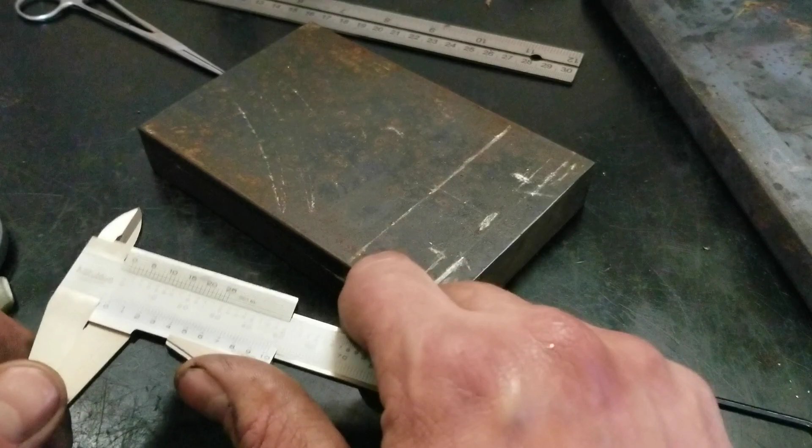So even amongst the toilet paper shortage, I happen to be short on end mill holders now too. I got some material in, and I've been kind of drawing it out. And yeah, sorry guys, I'm kind of hell bent on cutting the freaking dovetail because I haven't cut one yet. So that's kind of what my plan is for the future.

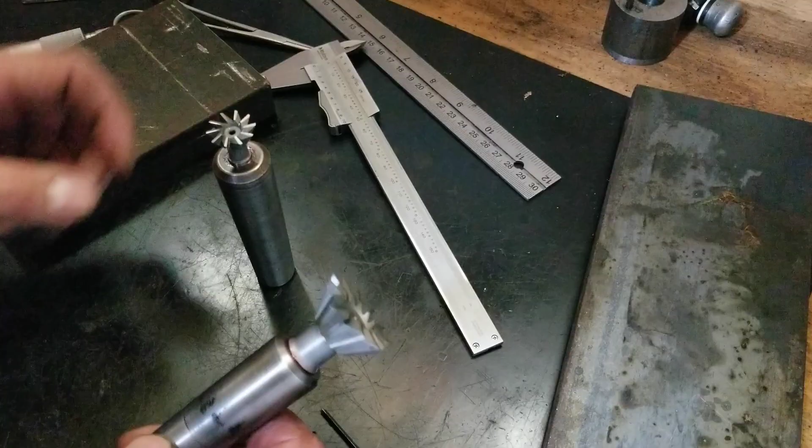So I've gone ahead and turned my only two good end mill holders into dovetail cutter holders. I stuck them on the lathe and I made sure that they were all just really perfect. I got them within maybe half a thou, probably less, of runout. So they should be pretty good. And yeah, I just Loctited them in there because, I don't know, it seems to work really good.

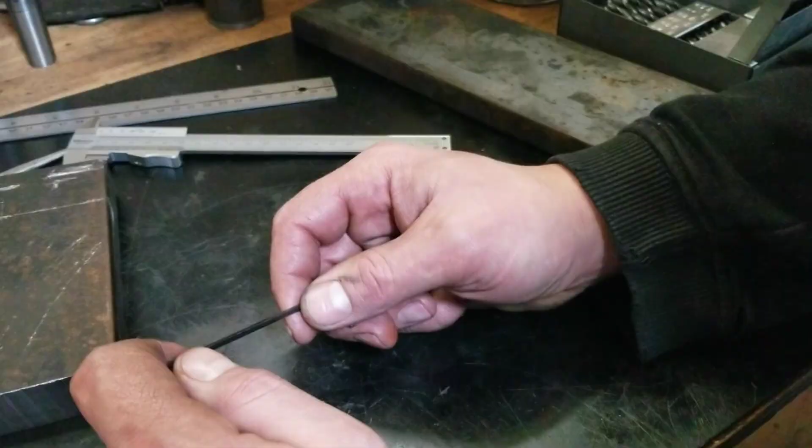So I know I've made end mill holders before, but I'm going to go about it a little bit differently this time. Incidentally, I've found a really good use for my steady rest finally. So let's head over to the lathe.

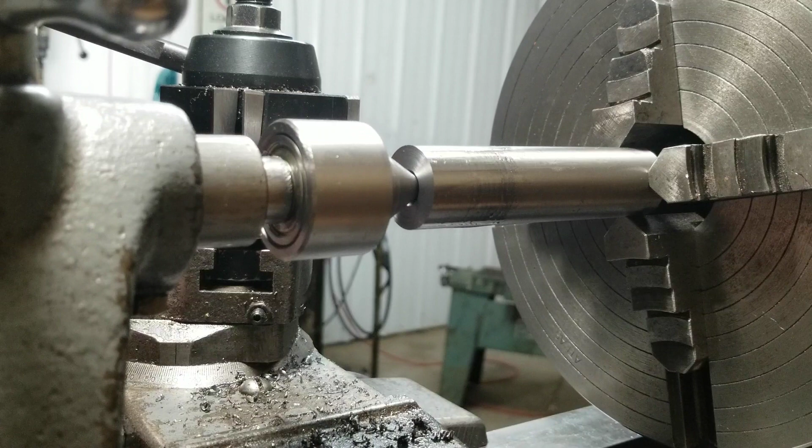All right, hopefully this angle's good. Let's see how good this fits up in here now. And that is, oh yeah, that's a really nice fit in there. You guys see that? Oh yeah, perfect. The reason I wanted to do the steady rest is so I didn't have to take this out again.

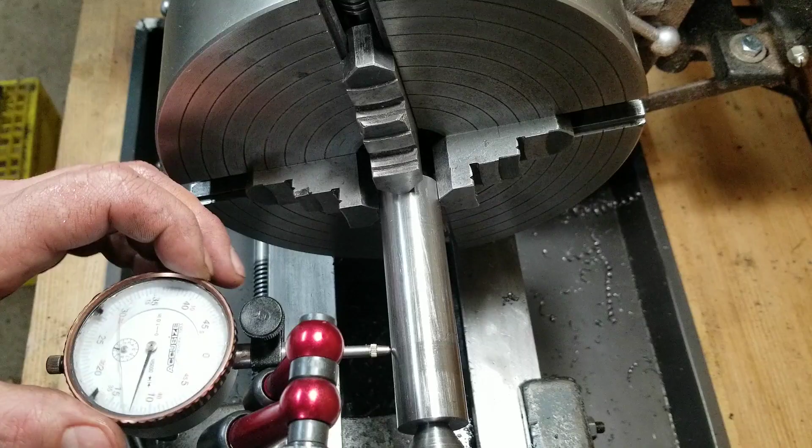So now I can cut that whole taper in there, essentially, without ever having to pull it out of the chuck. Dress up the end and cut the taper, and then it's done. The only part is I'll have to take it out to put it in the spindle. But the hardest part here is... that's amazing. I didn't think I'd get that on the first try. Sweet. All right, nothing doing but to get to it, I guess.

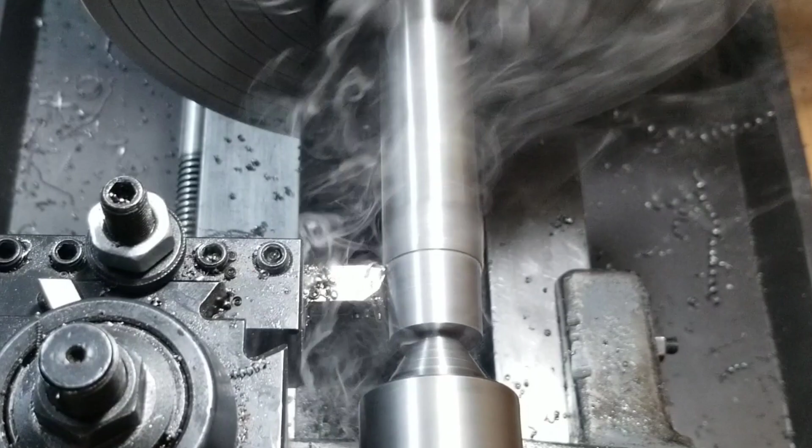All right, well, we're getting pretty close to the nitty gritty here. Looking for 778 thou on the end here, and then we're gonna have to switch it up and move to the other side of the taper. So far, everything's going pretty good. So we're 815, 835 thou roughly. It is kind of important to get it at least close, otherwise it'll be sucked all the way into the spindle, which is not good.

So we'll bring it in, we'll take another 30 off, and then we'll do a finish pass. That's 30 off the OD.

Yeah, I've had to stop every now and then because I've bought this real cutting fluid, I guess. And man, it smokes like crazy. Holy cow. So I've had to open the doors up every now and then.

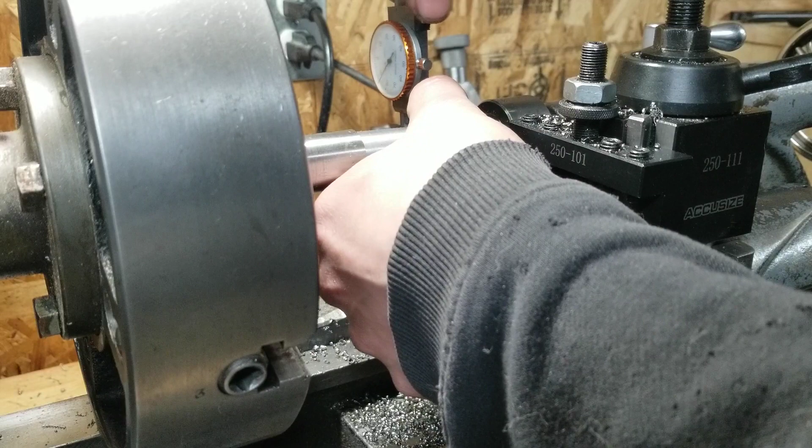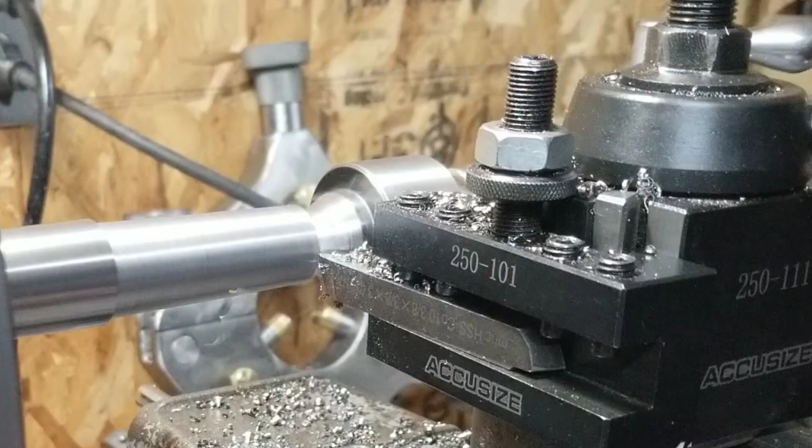Chips are breaking off really good though. Even for the high-speed steel, I got a pretty nice rake on there. That's a pretty decent looking finish on there. Okay, let's see where we're at here. Try to get as close to the end as possible. Yeah, we're 780 something here, so that's probably close enough. Well, maybe we'll just cut a quick little relief in there. That's about it.

Alright, now if I recall what I did last time, just to make sure that I didn't go too far, I wound this up all the way. The whole length is supposed to be 3.18 inches or something. So we should have plenty of room here. This is a good way to find your stop.

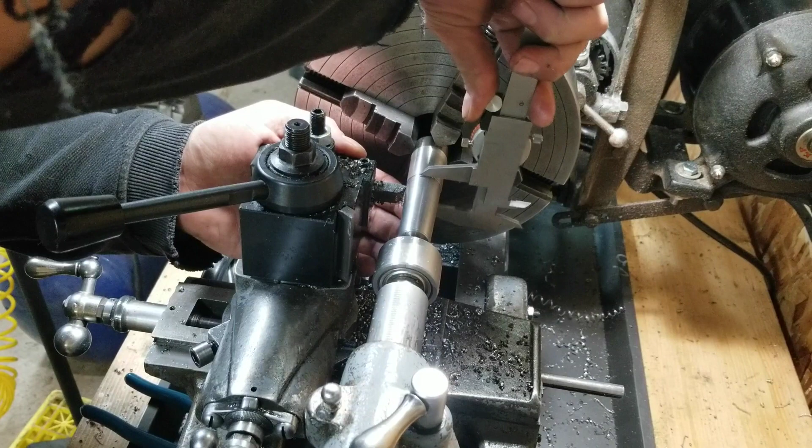Just want to see the difference here so I don't end up going too deep, because when I blend that in there, I'm going to mark it up a little bit. And 900 almost exactly. And 925. Alright, so yeah, it should be good right there.

Alright, I had to pause there and talk to the neighbor.

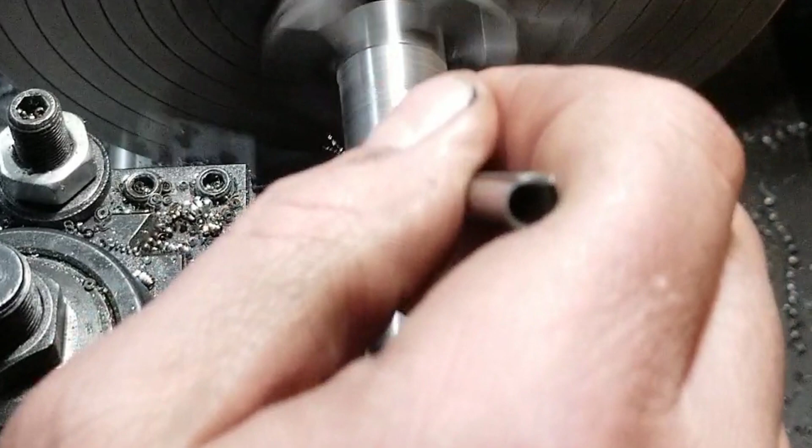So yeah, I'm gonna just barely nick that marker and then finish the rest of this taper off. That's the plan anyway. It might even be too much. About there. I think that should be pretty damn close. I didn't go far enough back here. That kind of sucked. I think that's what I did. There we go.

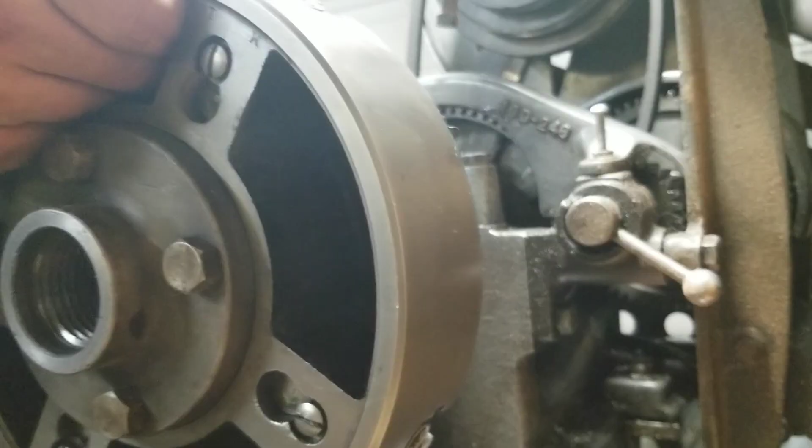And that, in theory, should be a Morse 3 taper. It sure feels good. We've got contact there, here. Looks like we got some right in the middle there. Well, it's really difficult to see. We got some right there. So yeah, we got several points of contact, the majority of the way down. Yeah, I think we'll be okay. All right.

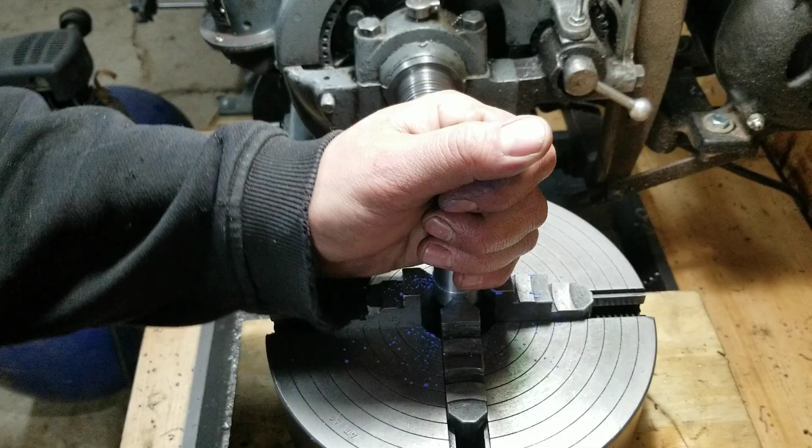So I actually have one more of these to make, and then one more taper, plus it's gonna have a big end on it for something.

So what you see me doing here is, well, I'm gonna make a fly cutter, I guess. Just a little guy, because obviously this thing can't handle too much more than that. I'm taking out 25 thou increments. Unfortunately, my Monarch is in the shop, so no 250 thou cuts this time.

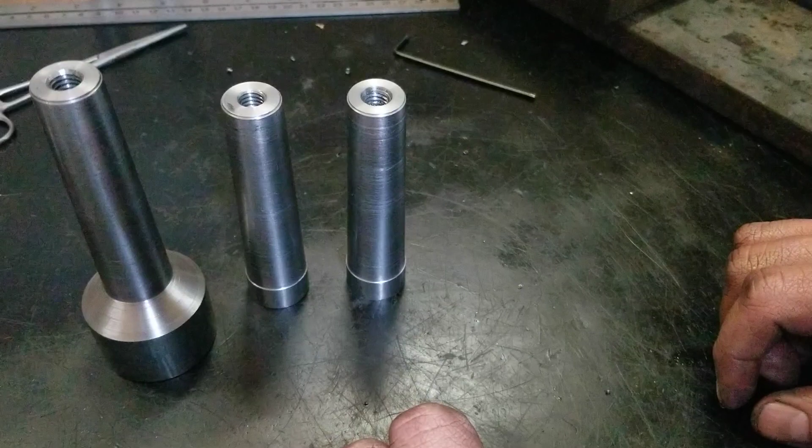Alright, well that's a start anyway. So that's going to be the fly cutter at some point. I'll turn that down and then I don't know what kind of angle. Some kind of arbitrary angle.

So these two are pretty basic. I actually think I have video on that already. So we're probably just going to skip those. That's just more of the same. But I have not made a fly cutter yet. So I'm going to stick this in the lathe. We'll turn off the outside and face it up and get doing some milling.

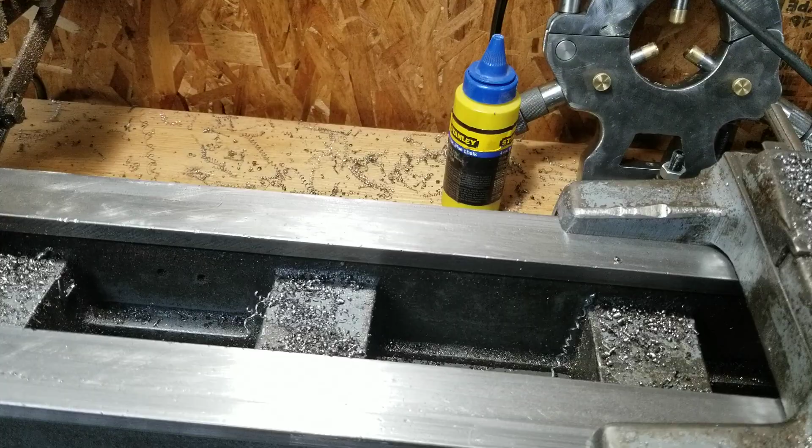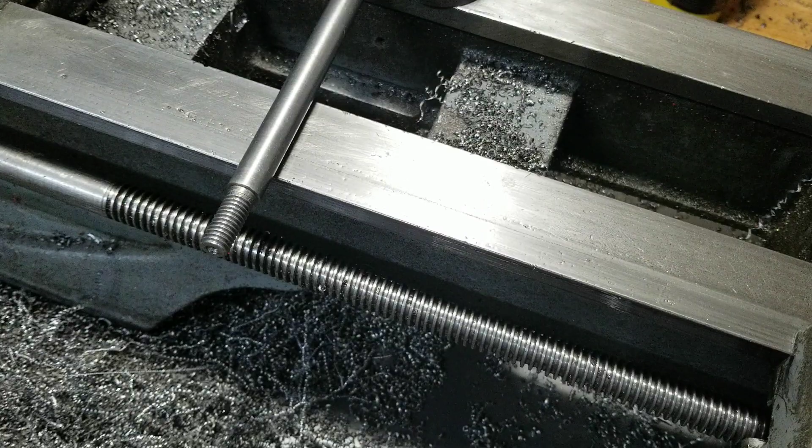All right, well, I generated a pretty good pile of chips. I think it's probably a good idea to clean some of that up. That's actually only about half of them. There's the other half.

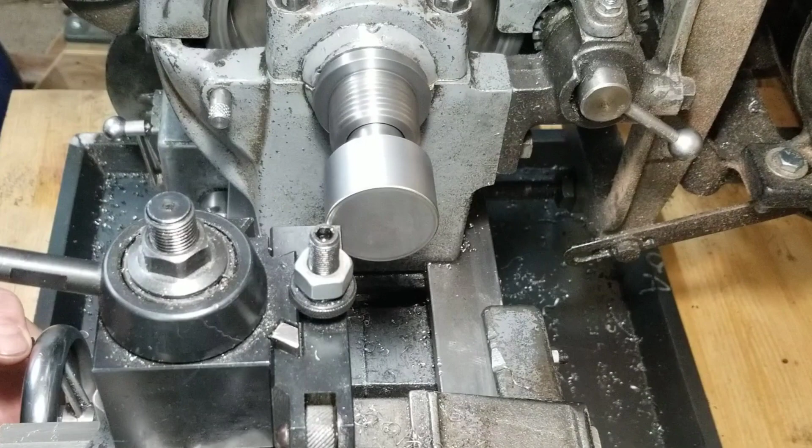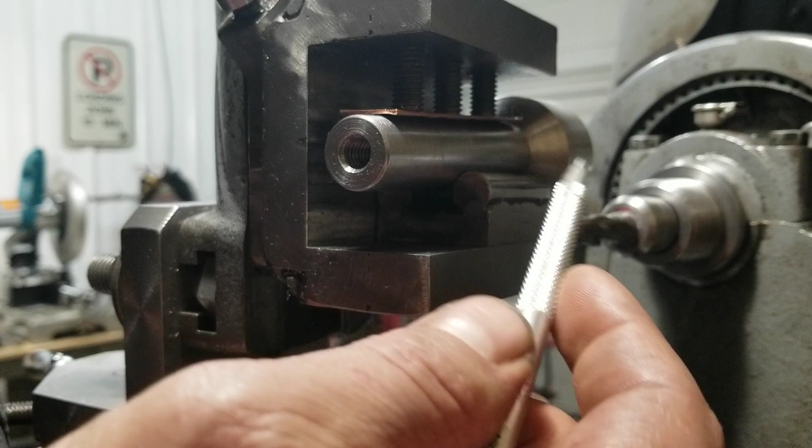Alright guys, this is our milling setup here. See if I can't get in the back to show you what's up. So I got it in the makeshift V-block sort of deal, and I clamped it in there, got some copper, and I realized the angles on here or whatever is there, but I squared it up to the ways plus stuck an indicator on it, and it's within about a thou. So it should be good there.

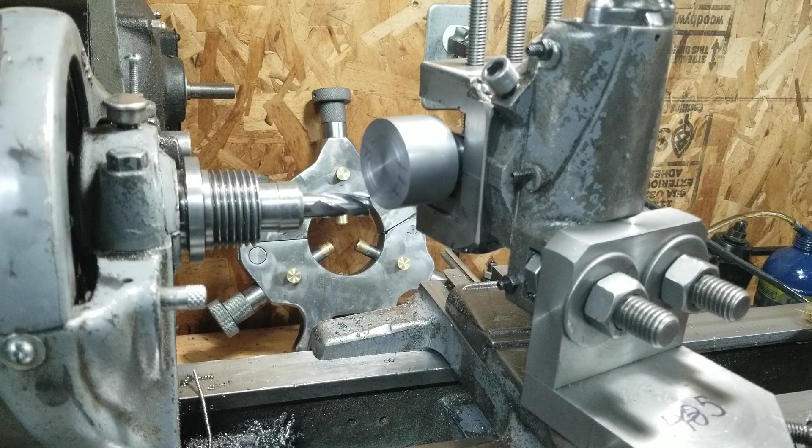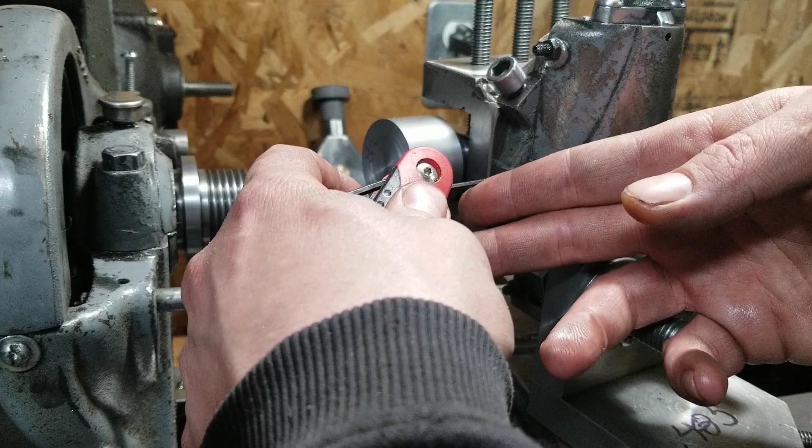Miraculously, we got just enough clearance on the top and bottom for this end mill. Ooh. Okay. Oh, this clumsy thing. Oh wow, this is actually going a lot better than I thought. That's a big cut. I think we're probably 200 thou in depth there.

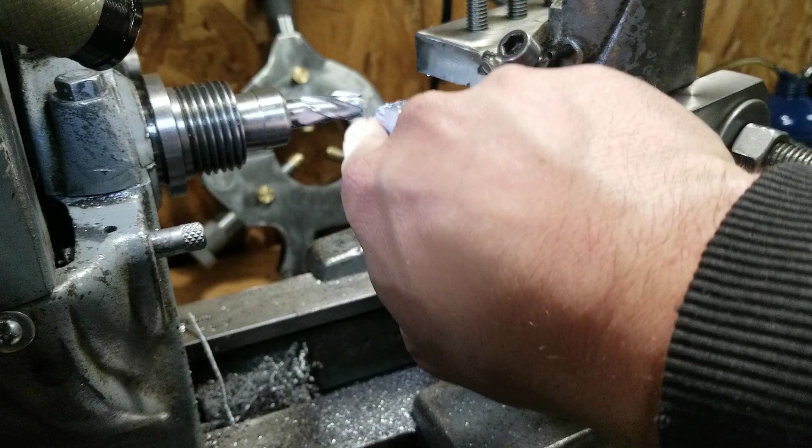Well, I gotta say, I am really happy with how that milled out. That's pretty good. It's the nicest end mill holder I got so far. Yeah, that is not bad. It's a pretty deep cut too. Well, deeper than I was planning, but that's actually good, I think. So yeah, I'm gonna finish milling this out, and I'll get back to you. Well, I guess I'm going with a 15-degree angle. See you in a bit.

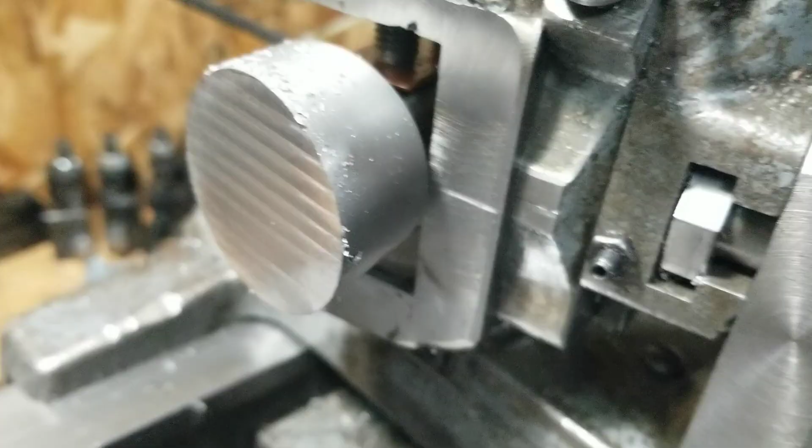All right, let's take a look at this beauty. Yeah, for a milling attachment, it did okay. I was doing pretty sizable cuts too. So now we're gonna have to take a more sizable chunk out of there yet, out of the top here, and mill another slot down here for the tool.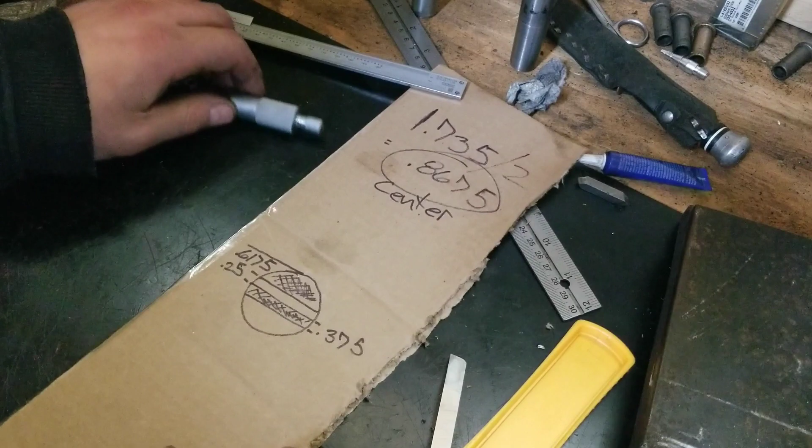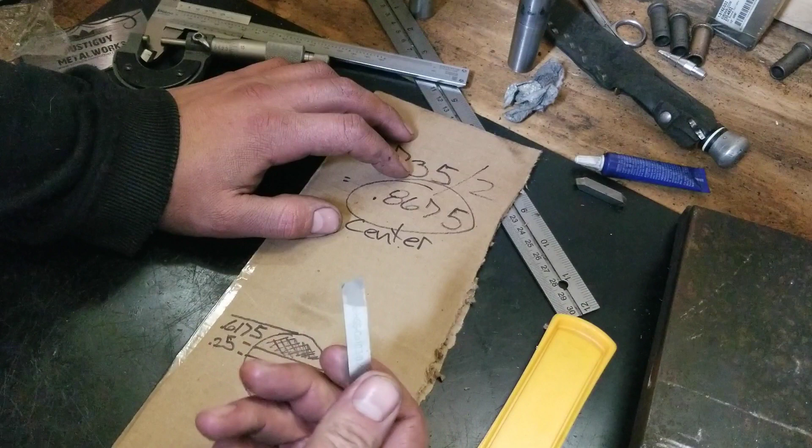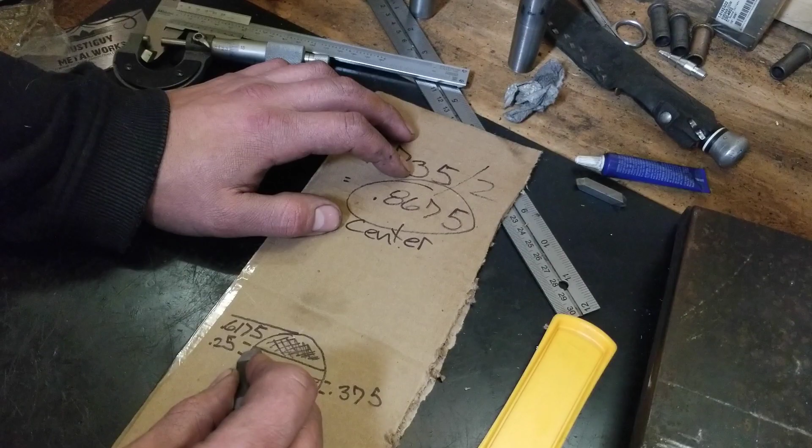All right, so here's my plan of attack. I got it drawn out here. This is where it's sitting at the moment, looking at the face, right in the lathe, mill, whatever you want to call it. So I plan on using 3/8 tooling. I checked it out, it's actually 2 thou under, so I'm just going to go straight up 375 on that for 3/8. I'll leave a 1/4 inch there for the set screws, and then this is all going to get milled off to the same depth. So this will be 375 square in there. But to do this part, you're gonna have to wait till that 1/4 inch end mill or reamer gets in.

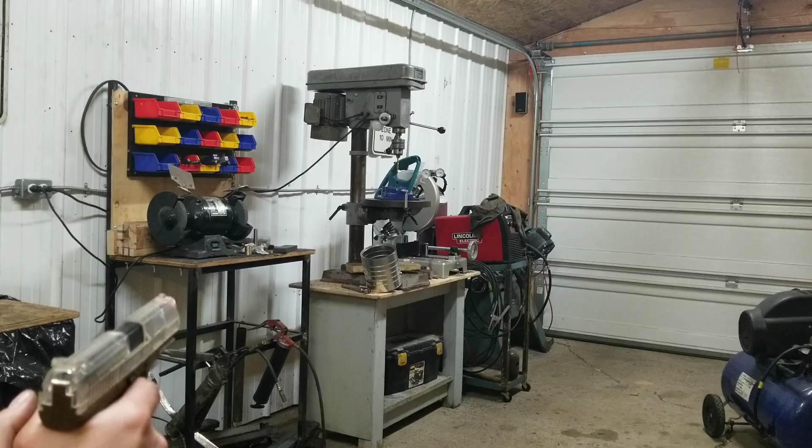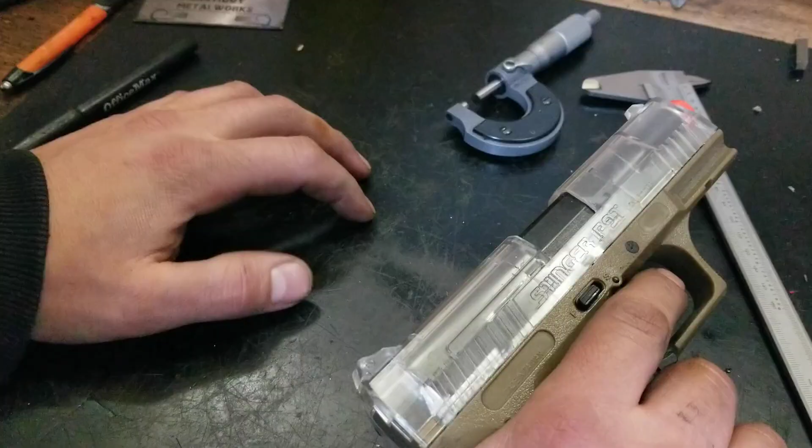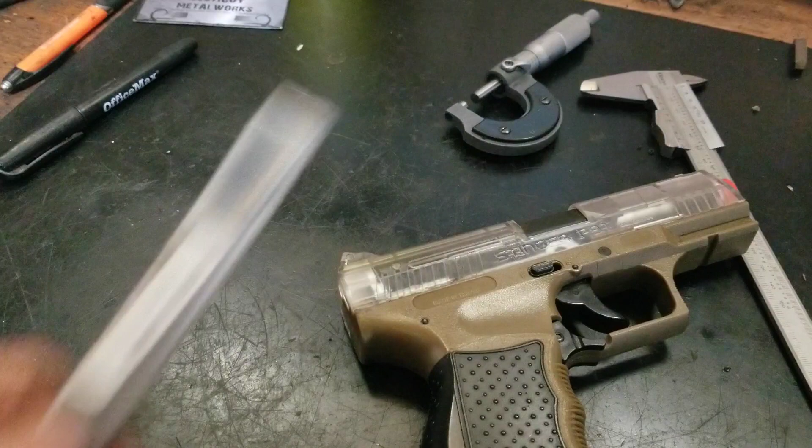Oh! Package for you, sir. Right, thank you very much. Finally.

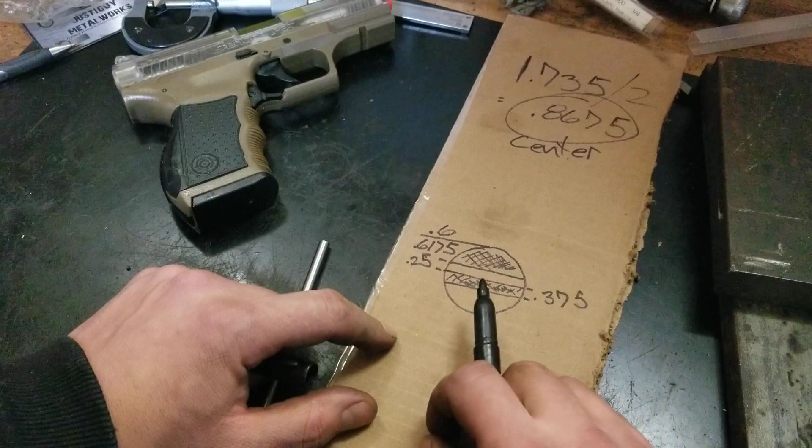Alright, so we got our tool to make this tool. So these numbers here, I've already got it dialed into where I'm going to start. This number here is 6175, that's an arbitrary number. That's just the maths. It doesn't mean that we have to take that much. It's always best to simplify this stuff. If you want to do it to the nearest thousandths, honestly, you just do this. It's not a big deal. Or 615 or whatever, something simple. It's a lot easier to wrap your brain around it and get it done.

All right, so I got her all set up here and dialed into where I'm going to start. On the y-axis, we got 150 thousandths. The z-axis, we got 125. And then we're just going to use the x for the travel. Got everything locked in already. She's pretty much ready to go, about 800 RPM, give or take.

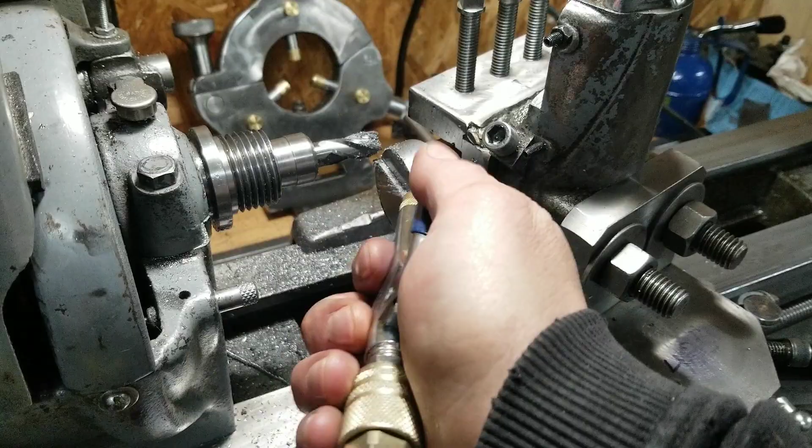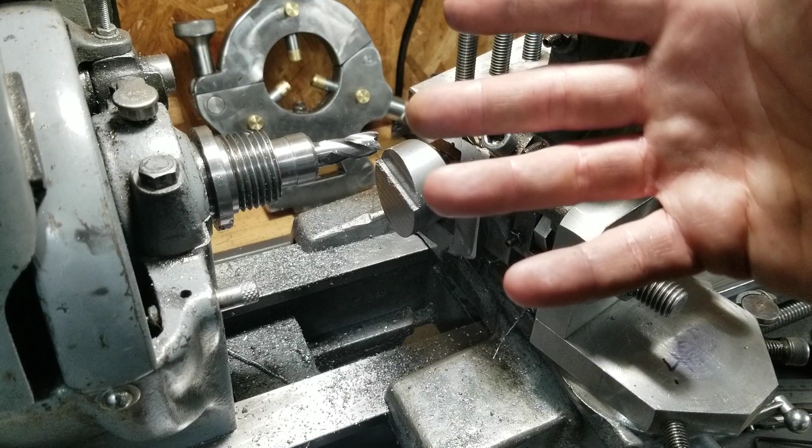Man, she mills stuff off like nobody's business. That's a perfect finish on there. All right, so I got to do two more passes like that. That's what I mean about simplifying your measurements, right? So we do 125 three times. That's our 3/8 of an inch. Then the last pass, I'll probably just do a skim pass along the whole length, and we can even go for that crazy number, the 617 thousandths or whatever. Honestly, I don't see why not. We totally could do that, so I think we will. So when I'm doing that part, I'll get right back to you.

All right, so we just hit our mark. Well, I didn't do the spring pass yet. We can go another thou or so. As you can see, we got a really nice even line there. And I actually overshot this by about 4 thousandths of an inch, according to this. So that's not bad. Well, not even 3 thousandths. I'm going to run it back through there, hitting this whole surface. It doesn't even really need it, that's a really nice finish. Perfect. But I'm going to do it anyway, because it'll get us closer to our next mark when we got to swap out the end mills, so we'll know where our center is.

And I'm kind of up in the air with the whole cutting fluid thing. I don't know if it helps with the carbide or what, but we'll use it anyway. Maybe we'll get a nicer finish out of this. Yeah, it's kind of a big pass. We'll see how this pans out.

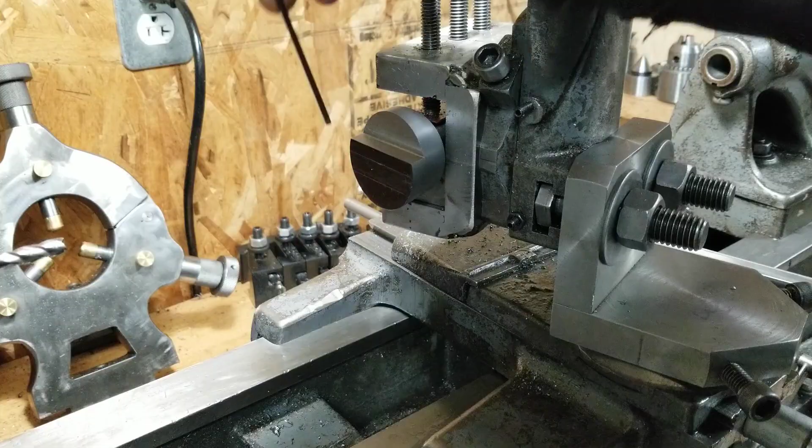All right, so I've painted it up and scribed in some layout lines here. I've set the end mill to cut a path straight down the middle. And then once we get down to depth, we'll take a little off the top and bottom and get it fit up really good for the fly cutter's cutting tool. I'm not going to go quite so deep with this cut since the whole end mill is buried right in there, so we'll see how this goes.

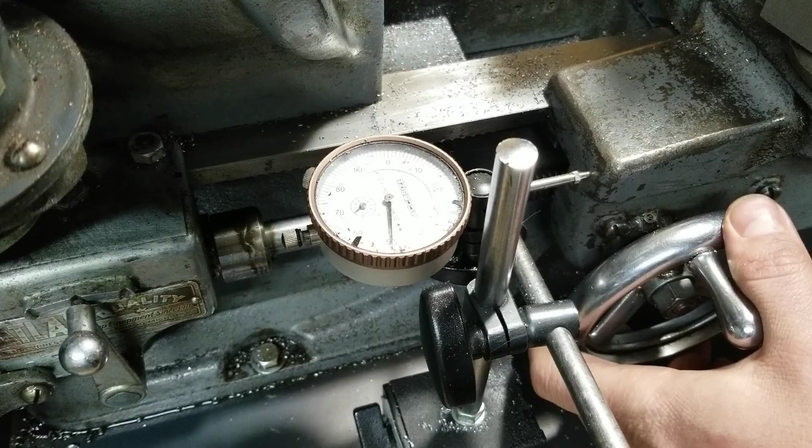Alright. Yeah, I think it's about 1100 RPM. About a 50 thou depth of cut. Just do 50 thou at a time until we hit 375. Yeah, definitely gonna have to do sliver control on this one.

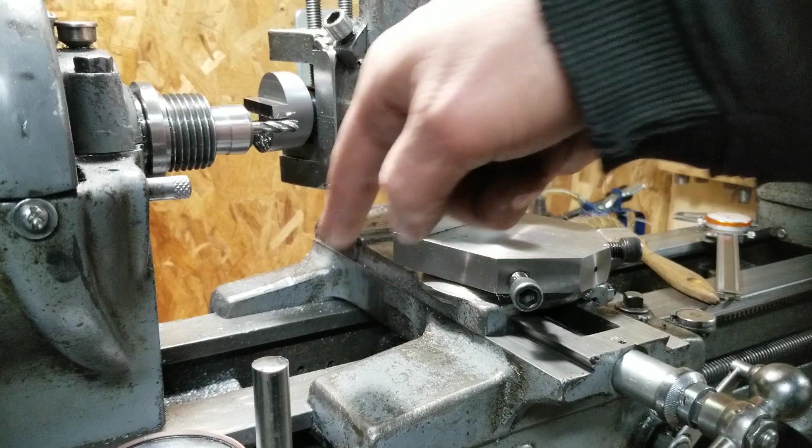Okay, guys, well, you see what I'm up to here. I just got a little bit more to take off this part. And then I'll bring it back down and cut it and get right back to you. All right, did a couple spring passes just to make sure it was all nice and cleaned up. According to this, we're sitting right where I was expecting to be at 370 thousandths. So we just got a little 5 thou pass to make and it should be done deal.

All right, I gave it a climb mill and then a spring pass on the way back. So I'm gonna deburr that just a skosh, if I can find my file. There it is. Can't bring it back any further. All right, we'll try that out and test fit a tool.

Oh, well, that's pretty tight yet. Well, I think we're gonna have to go another couple of thou. I don't know if we want it that tight. See, that's really, really tight. I don't know, a little quick file job would probably just straighten that right out. No, I think it needs a little more in there.

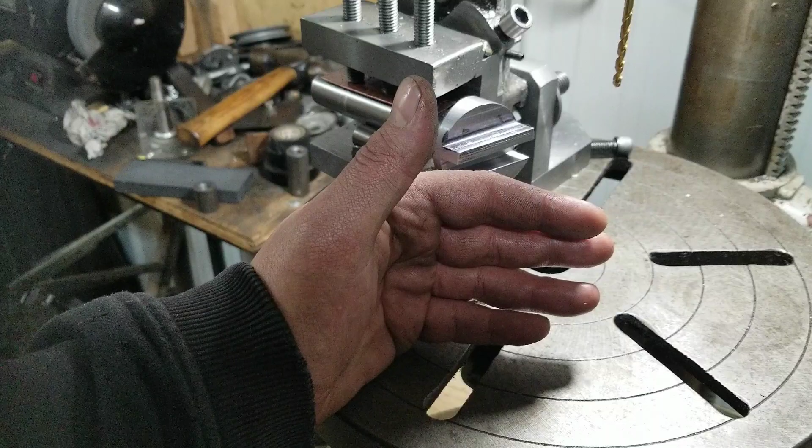Okay, well, you might be asking yourself, what the hell is this guy doing with this milling attachment on the drill press? Is it mill envy or something? Yes, it is. It's mill envy. No, honestly, it just seemed like a really good idea since it was already squared up and everything. Just take the whole attachment off and bolt it to the table and done deal.

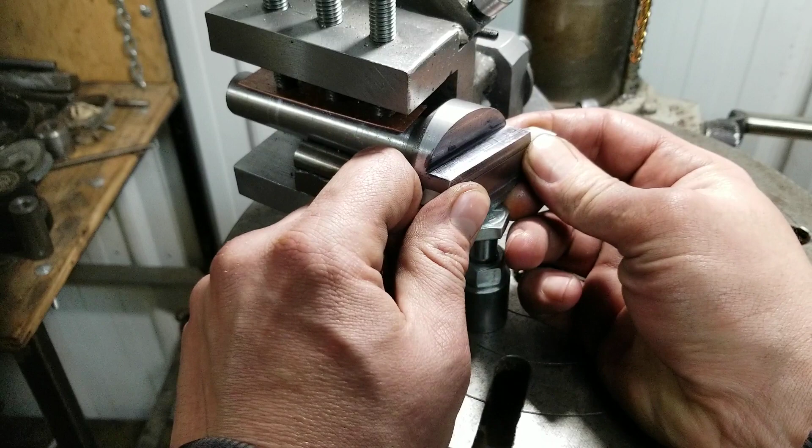Anyways, so it actually took several little annoying passes, but oh, now what did I do to it? It was fitting. There we go. We got a really nice fit in there now. So it's pretty much perfect. Just one side of this tool seems to be a little bit bigger than the other, but it's pretty good. It'll be fine. Voila. So anyways, I'm going to drill 3 holes in there for 10-24 set screws, and by rights it should be ready to be tested.

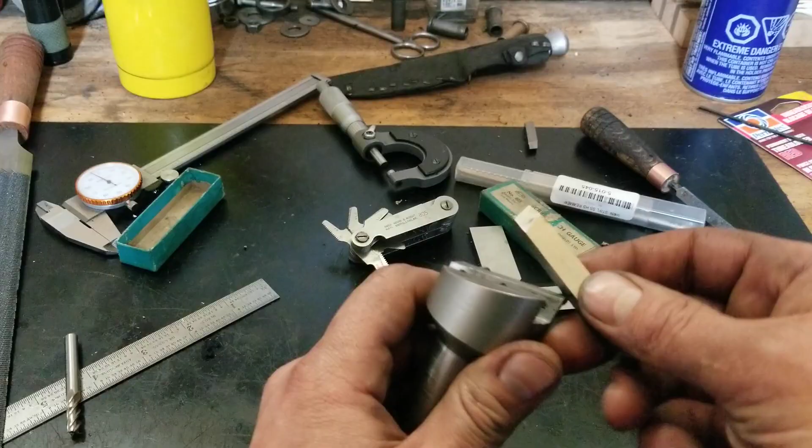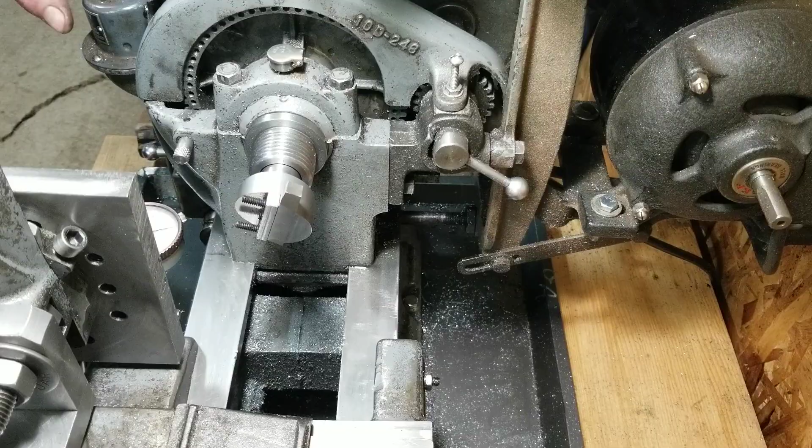Yeah, I'm probably not going to be able to get this on camera. So, I have never fly cut anything before. I really only have one thing that I can fly cut at the moment. We got to do the obligatory test run for sure. All I can think of right now is this thing. Maybe clean up the face a little bit. It's actually really good already, but a fly cutter supposedly does a really good job, so I'm going to do that. Well, there goes nothing. Hey, give you guys the best seat in the house.

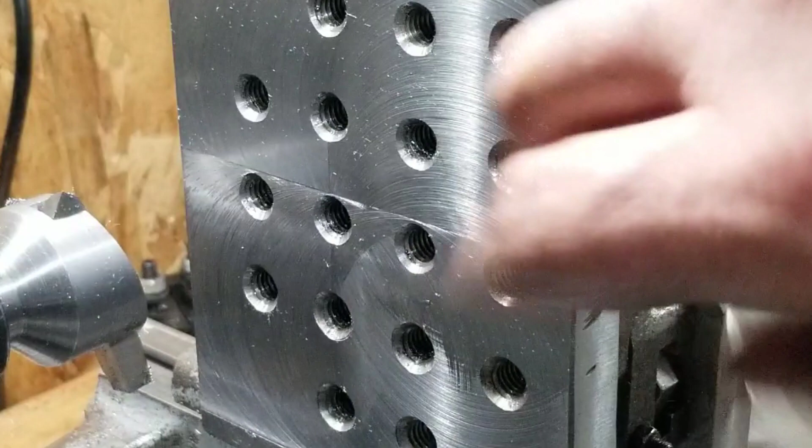Let's see what my first fly cutter cut actually looks like here. I see where I changed direction and I messed with the gib, and it just left the line there. So there's that. But that is really smooth from parts that I didn't pick up. Well, to be sure, my technique could use some work. It does work though. I think it could use a couple little tweaks here and there, but as far as I can tell, it's definitely a fly cutter.

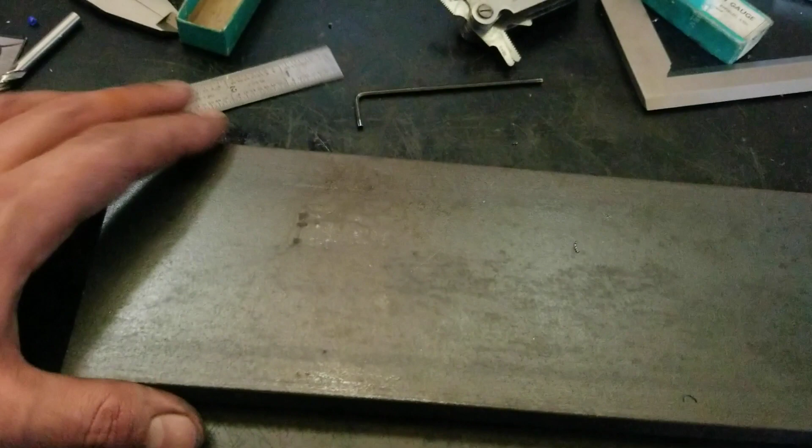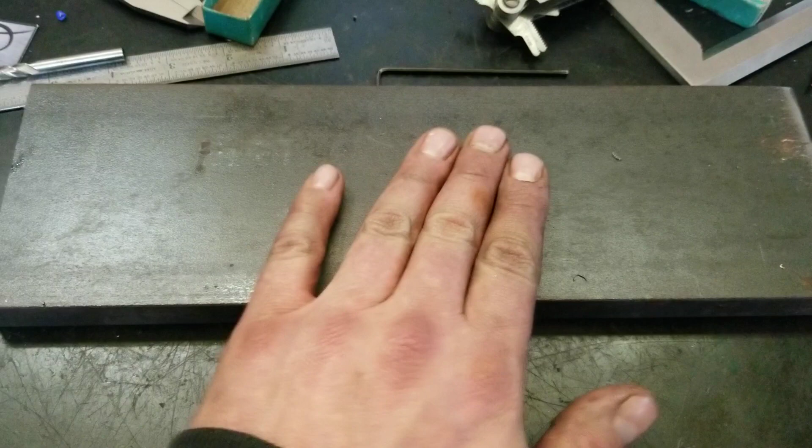Now, what I really had planned on fly cutting... Admittedly, it's 12 inches long. That's why I needed a fly cutter, because obviously you can't fit that in the lathe. So I don't know. I'm hoping I can face that off, because I'll have to do some of it and then reposition it, and then some of it, then reposition it. So I want to see how much reach I at least had with that thing. So now I know.

Well, I hope you guys are making the best of your self-isolation. You know, I'm a bit of an introvert, so it's not really fazing me all that much. Anyways, you guys, stay safe out there. Look out for one another, eh?